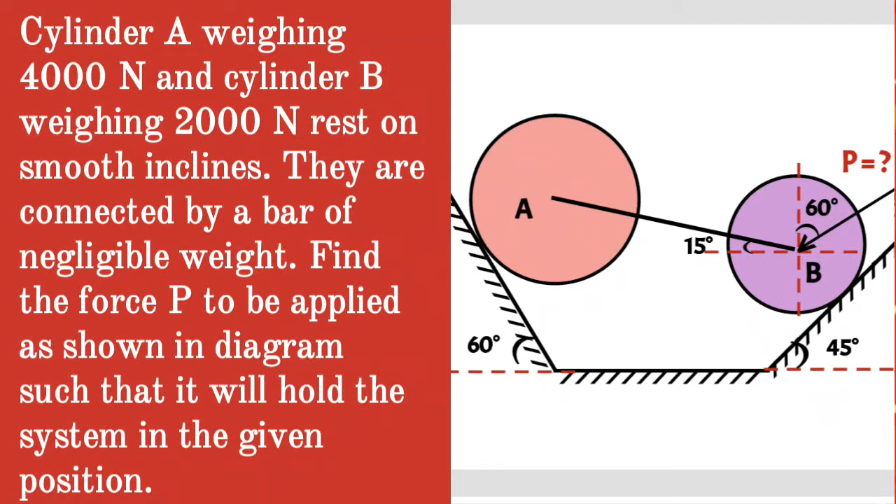Given question: cylinder A weighing 4000 Newton and cylinder B weighing 2000 Newton rest on smooth inclines. They are connected by a bar of negligible weight. Find the force P to be applied as shown in the diagram such that it will hold the system in the given position.

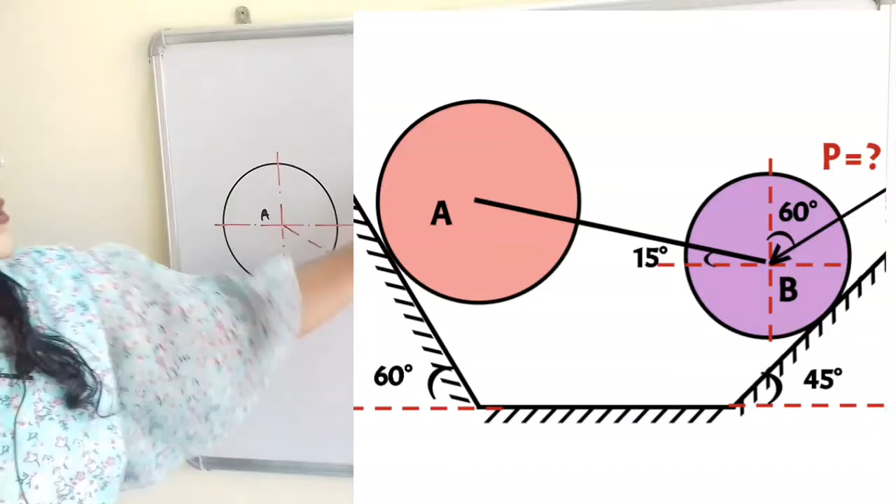Let us understand the given system. There are two cylinders A and B connected with the help of rod AB, and we have to find out the force P applied at the center B to hold the system in the equilibrium position.

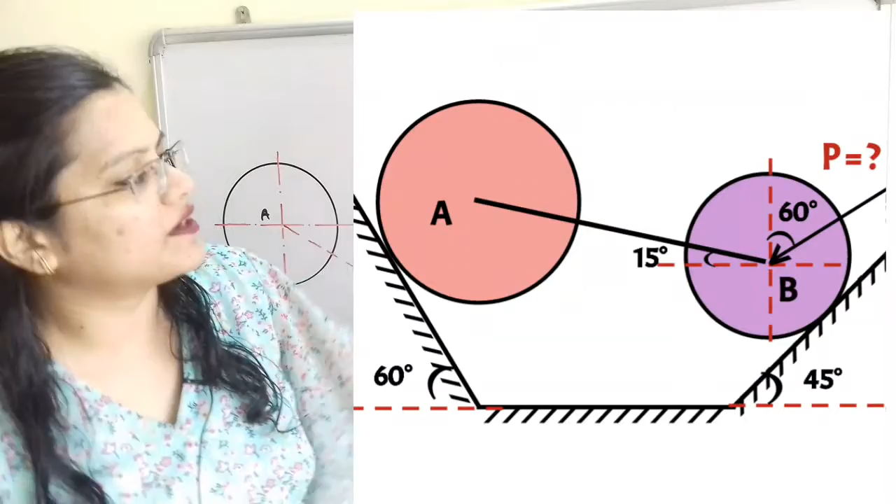Now if we observe, cylinder A is placed on an inclined surface at 60 degrees to the horizontal, and cylinder B is placed on an inclined surface at 45 degrees to the horizontal. The inclination of this bar AB is also given as 15 degrees, and the force P is applied making an angle of 60 degrees with the vertical. Weight of cylinder A and B is also mentioned in the question.

So the first step is to draw the free body diagram. First we will draw cylinder A and cylinder B, and we have to connect these centers. Now this center, that is the line joining AB, is making an angle of 15 degrees with the horizontal.

So we have to mention this, here is the 15 degree angle. Now if we observe the horizontal line passing through A and the horizontal line passing through B, both are parallel, and this is the common inclined line AB. So this angle that the inclined line makes with the horizontal line is also equal to 15 degrees. These are the opposite angles.

Now cylinder A is in contact with the inclined surface, so a reaction is developed. We will say here is the point of contact 1 and this is the point of contact 2. So the reaction developed will be perpendicular to the inclined surface. We have to show here this reaction R1.

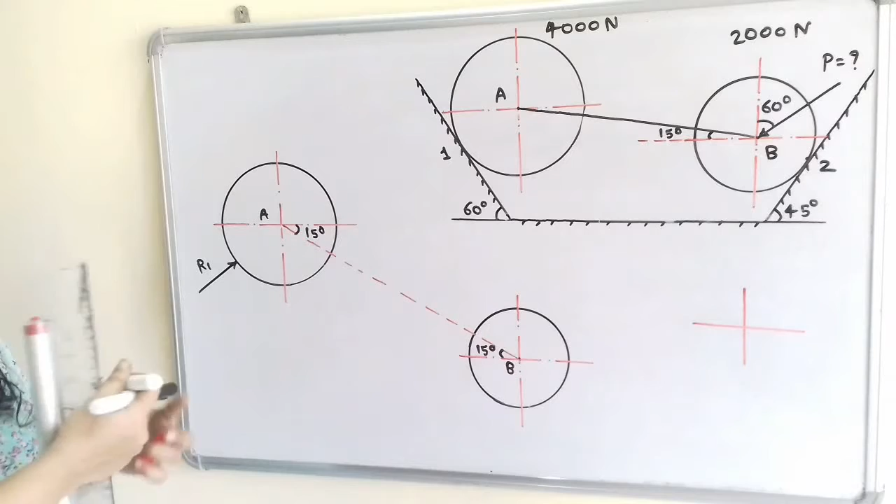Now if I extend this R1, then it will meet the center point A. Now how to find out its angle? If we observe, this R1, the line passing through the center, is perpendicular to this inclined line, and this vertical line is also perpendicular to the horizontal line. So the angle between these two perpendicular lines will be the same, that is this 60 degrees.

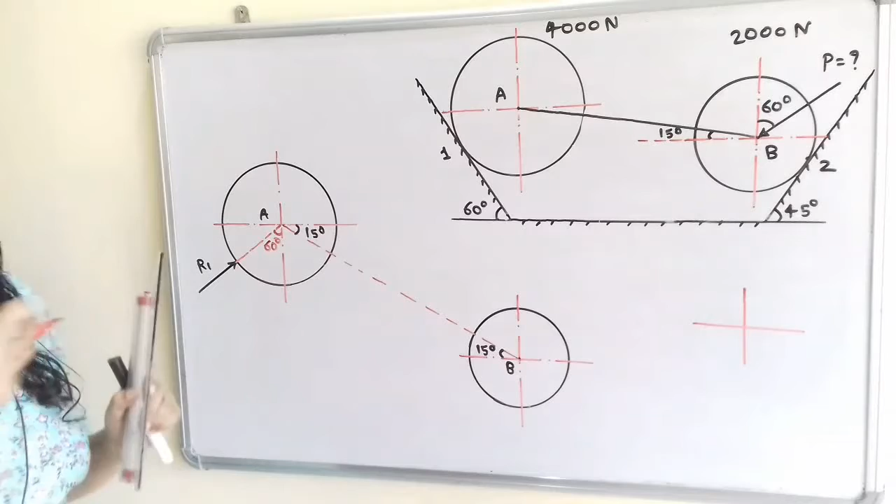Now we have to show the weight. Weight always acts in the vertically downward direction, so we will show here the weight, that is equal to 4000 Newton.

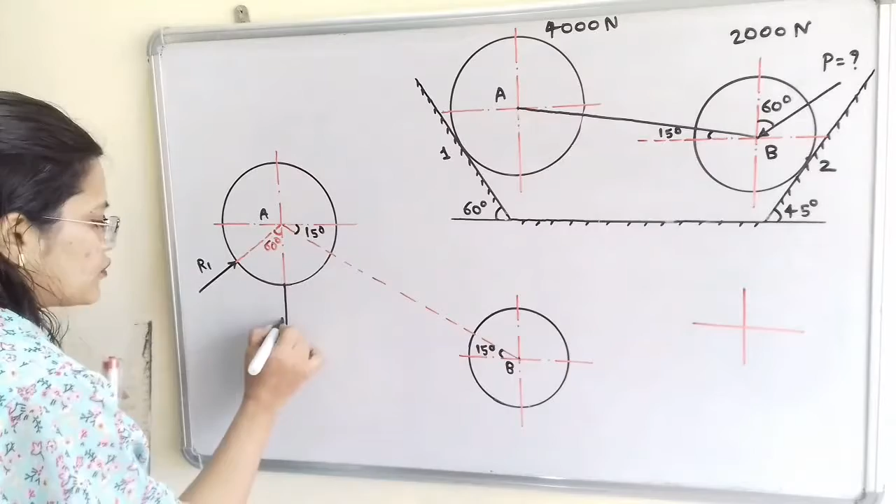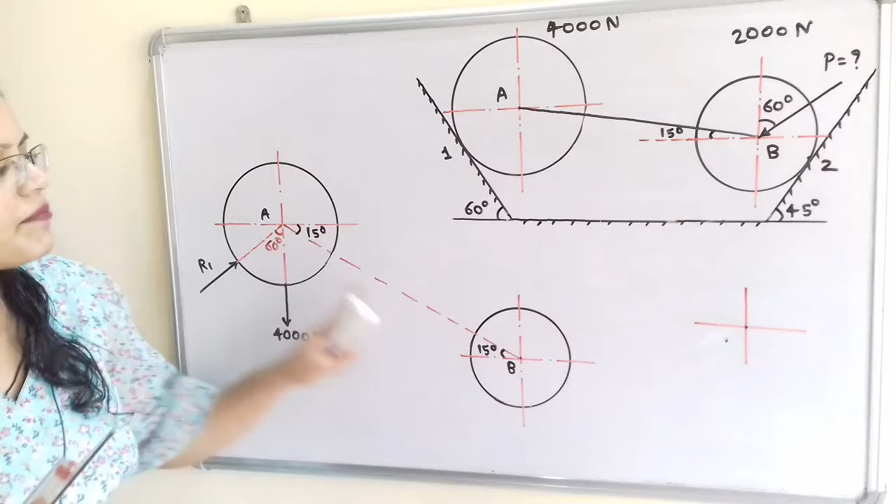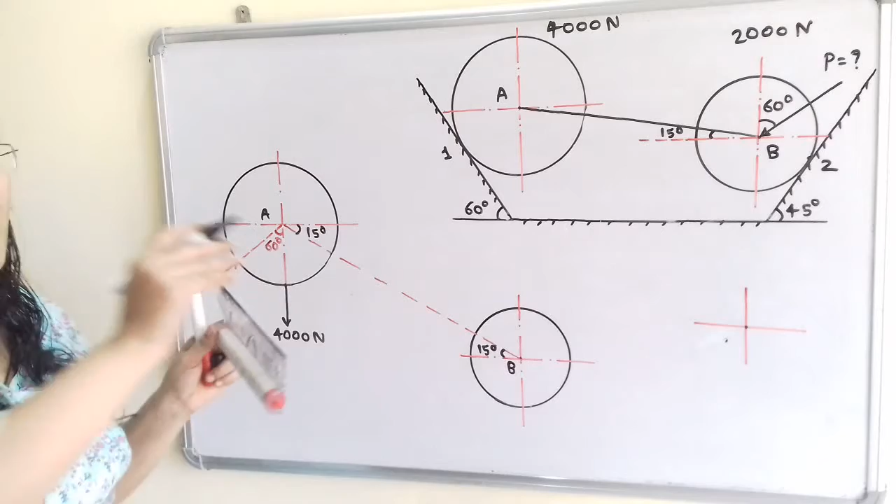There is the bar AB which is connected to the center of cylinder A, so either there is tension or compression in bar AB. We will consider here that compression is created, and due to compression the direction of this reaction force we have to show towards the center of cylinder A. We have to take the assumption, so we can take either direction, towards the center or away from the center. We will consider the direction of reaction towards the center of the cylinder, and we will call it C.

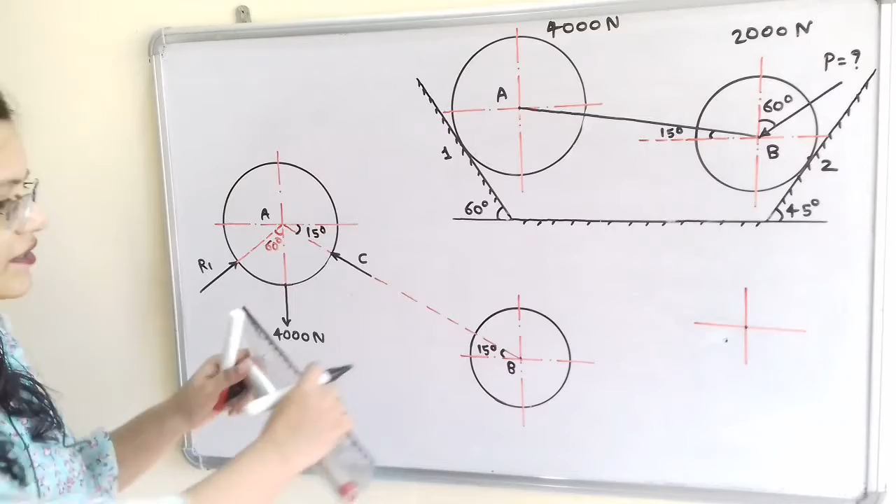Now we will move to cylinder B. If we observe here, there is compression. If this compression is towards cylinder A's center, then in the same way for cylinder B there is compression applied towards center B. So it is equal in magnitude but opposite in direction. We have to show this C.

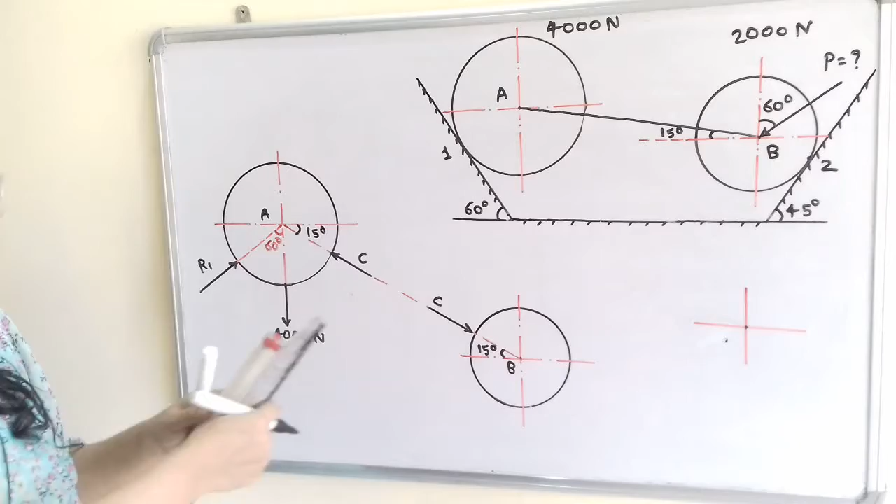Now we have to find out this P applied, which is making a 60 degree angle. We have to show it as it is, acting towards the center, making a 60 degree angle. So here is P, and at the same time we will join this force P with the center and show the angle. So here the angle is 60 degrees, as mentioned in the question.

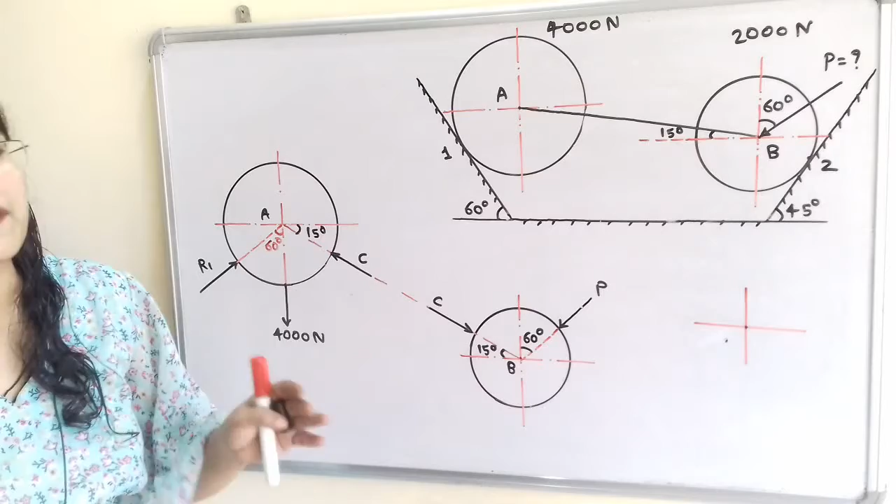Now there is the point of contact 2, and at this point of contact we have to show the reaction, which is in the perpendicular direction to the inclined surface. So we have to show this, and it is known as R2.

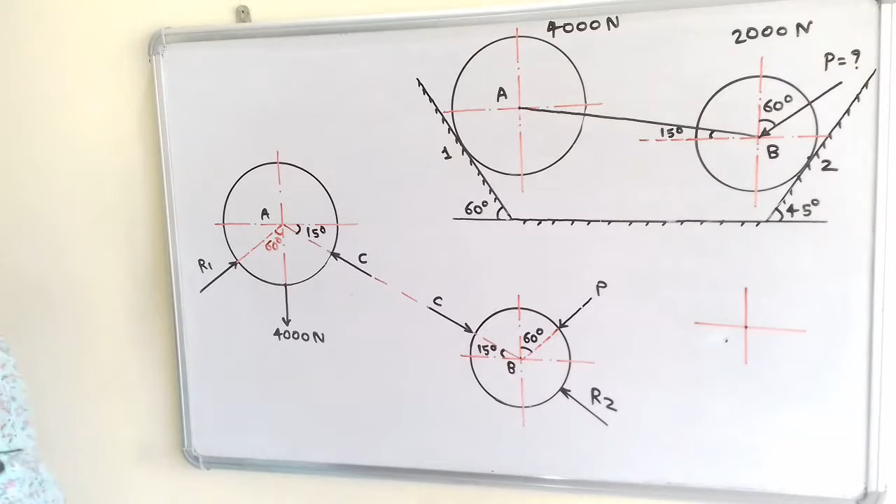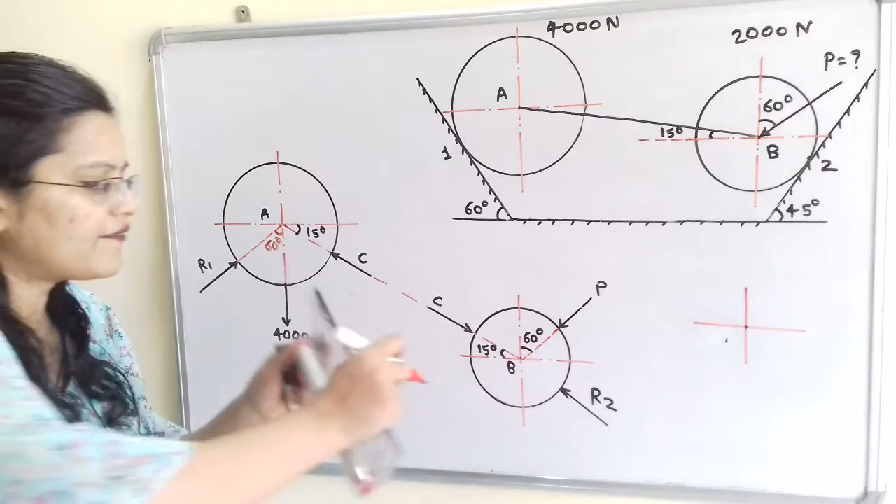Now this R2 is making an angle of 45 degrees. If we observe, R2 is perpendicular to the inclined surface, which makes an angle of 45 degrees with the horizontal. For this horizontal, the vertical line is perpendicular. Now I will extend this R2. R2 is perpendicular to the inclined surface, and this vertical line is perpendicular to the horizontal surface, so the same angle at the point of contact between these two lines equals 45 degrees. We have to mention this.

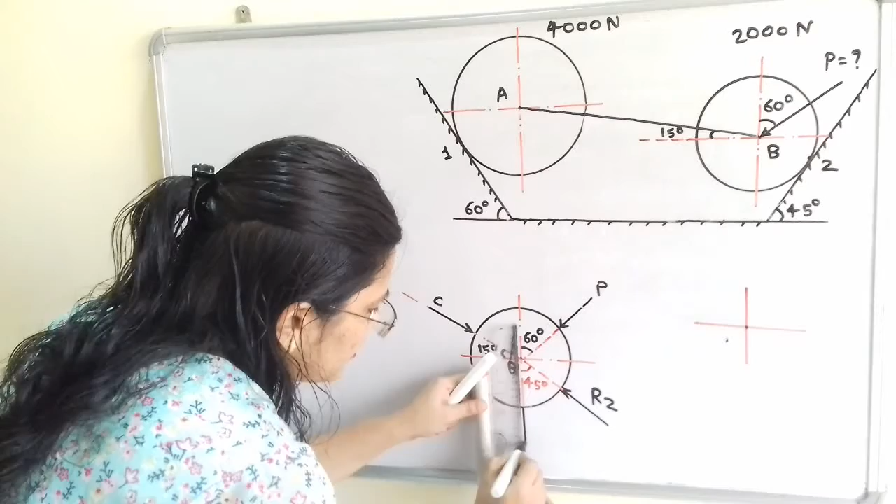Weight of cylinder B is given as 2000 Newton, and it will act in the vertically downward direction passing through the center. We have to mention this here. We have to find out the value of P. So this is the question.

Now we have to first find out the value of C, because C is connected to cylinder B and also to cylinder A. If we concentrate on cylinder A, there are three forces which are concurrent because they pass through the center point A, so we can apply Lami's theorem. We will rearrange these forces so that they move outward from center A. So how to show that?

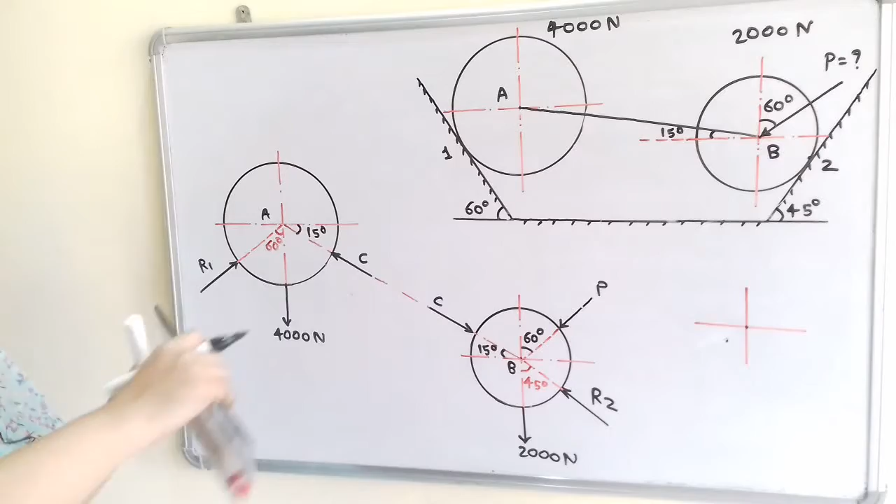I will extend this C in the opposite direction. Here is the horizontal line and here this C, so the direction will be same. Now it makes a 15 degree angle with the horizontal. Here is also a horizontal line, so the same 15 degree angle, we have to mention that.

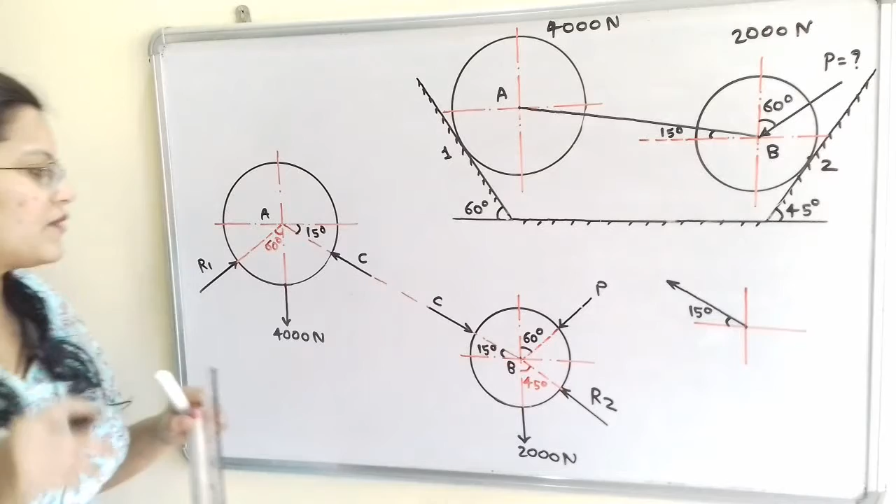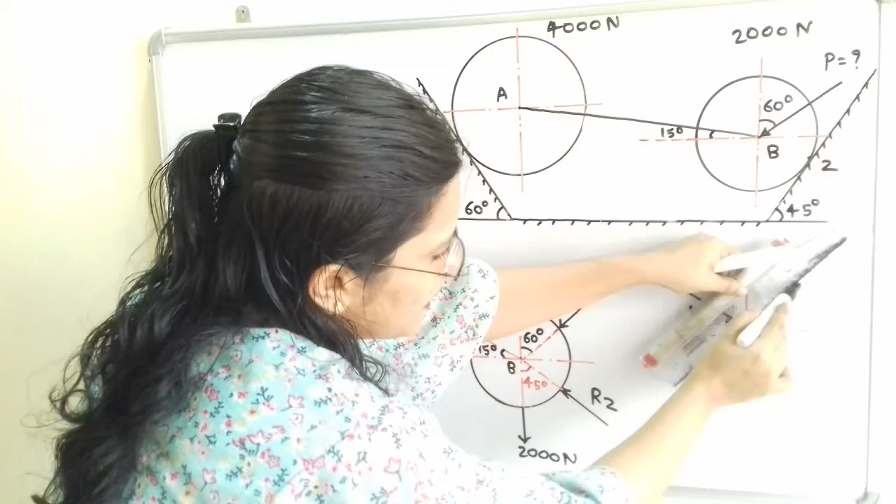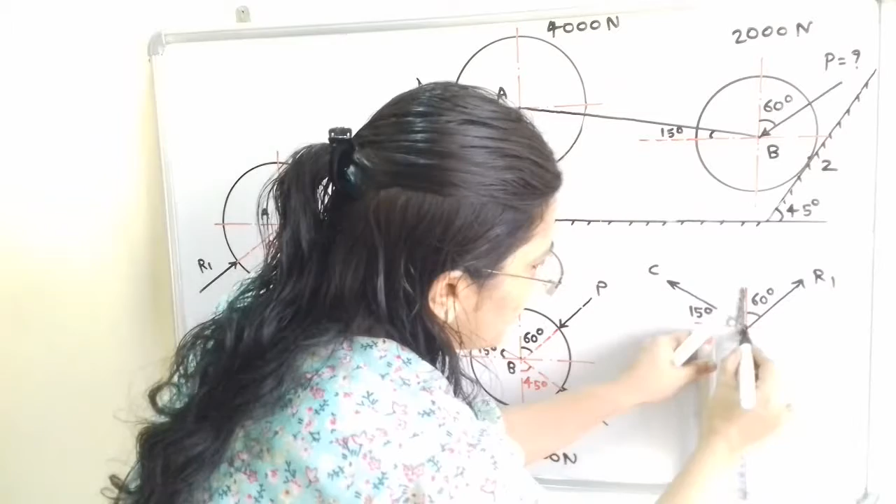Now we will extend this R1, which passes through C in the outward direction from A. With the vertical line it makes an angle of 60 degrees. If we observe, here is also a vertical line, so we have to show here the 60 degree angle, and it is R1. We have to mention R1, C, and this 4000 Newton, which will act in the downward direction. Here we show 4000 Newton and here is the center A.

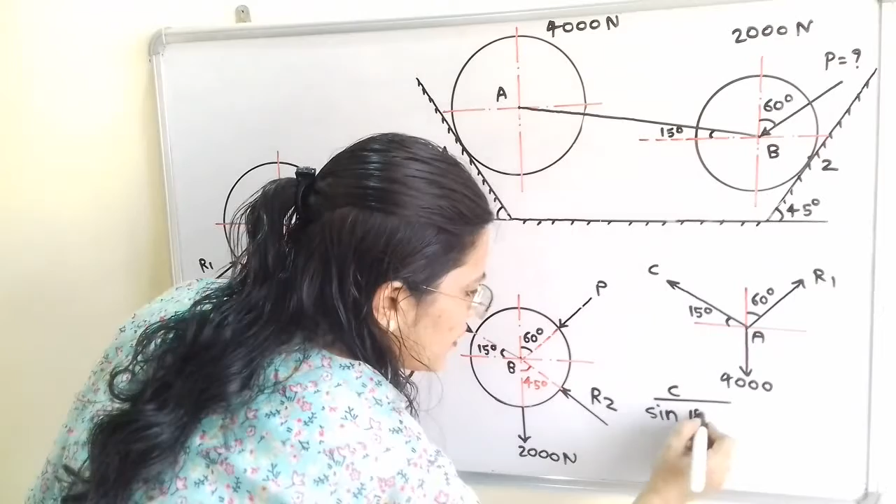Now we can apply Lami's theorem. Our aim is to find out C. So how can we write this? C divided by sine of the angle between the other two forces, that is between R1 and 4000. How do we find that? That is 180 minus 60. Sine of 180 minus 60, which equals, now 4000 is known, so 4000 divided by sine of the angle between the other two forces. So how do we find the other two forces?

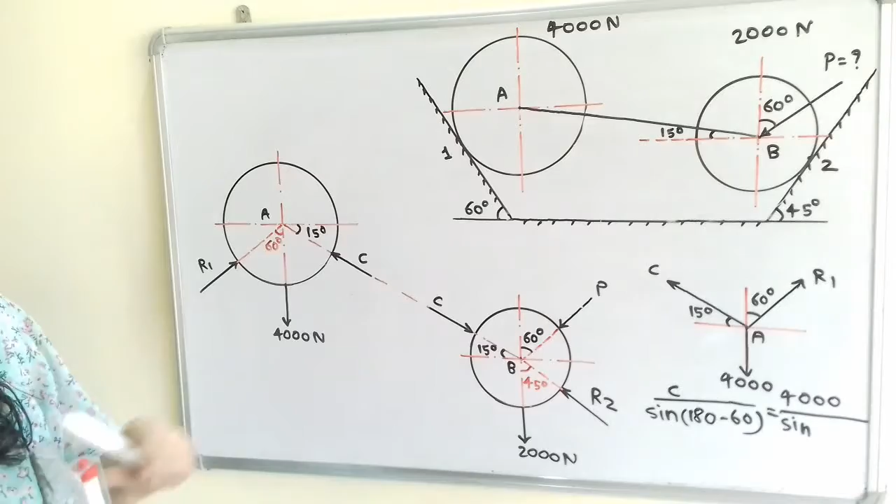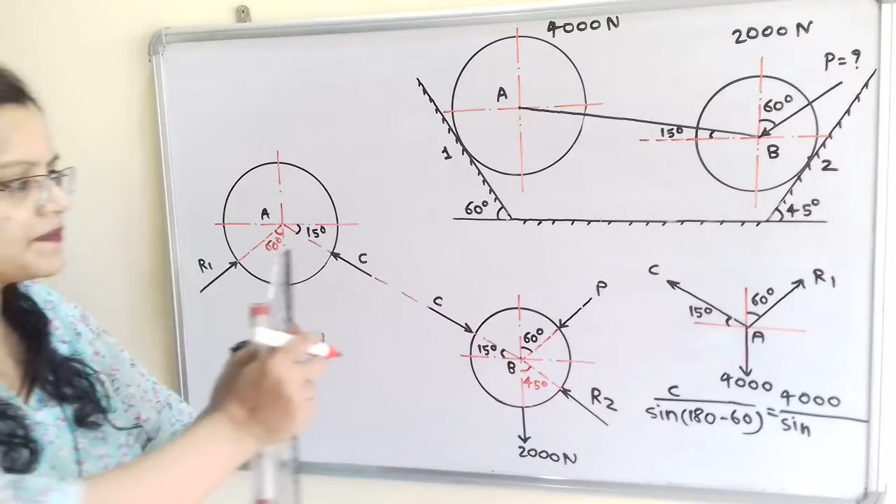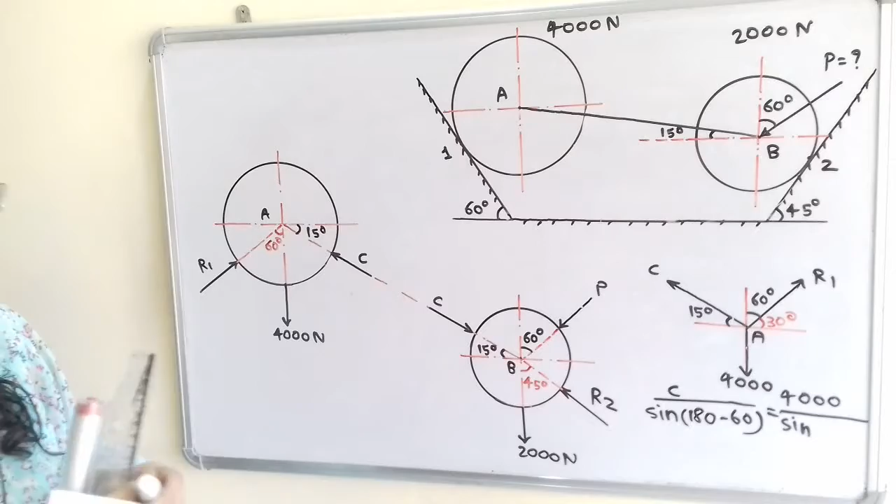We can say that 180 minus, now here 60 plus 30 equals 90, because this vertical line and horizontal line are perpendicular to each other. I will mention this. Here the remaining angle is 30 degrees. So how can we find the angle? 180 minus 30 minus 15. So sine of, I will write here 180 minus 30 minus 15. This right hand side term is known, and we can find the value of C.

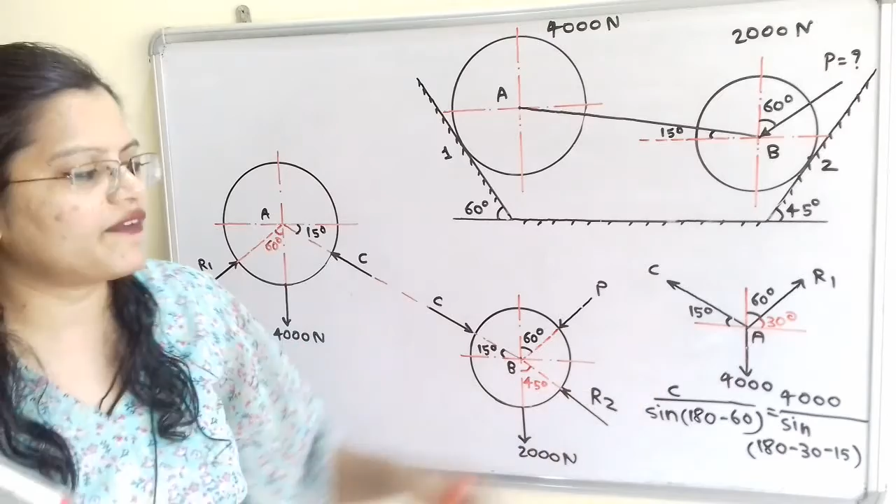Calculated value of C is 4899 Newton. Now we will move to cylinder B. Related to cylinder B, this force C is known, P we have to find, and R2 is unknown.

But this R2 is perpendicular to the inclined plane, so we will resolve the remaining forces into two components: one parallel to the inclined plane and the other perpendicular to the inclined plane. So there is no need to find the value of R2. We will first draw one line which is parallel to the inclined plane.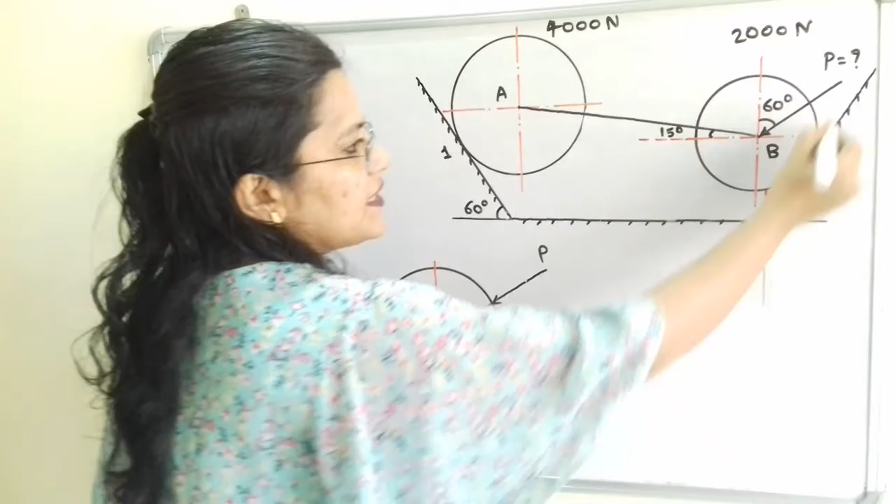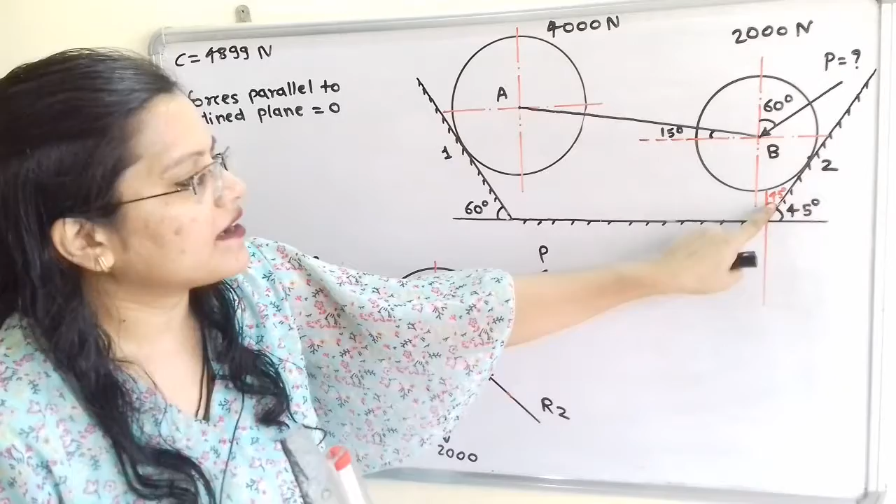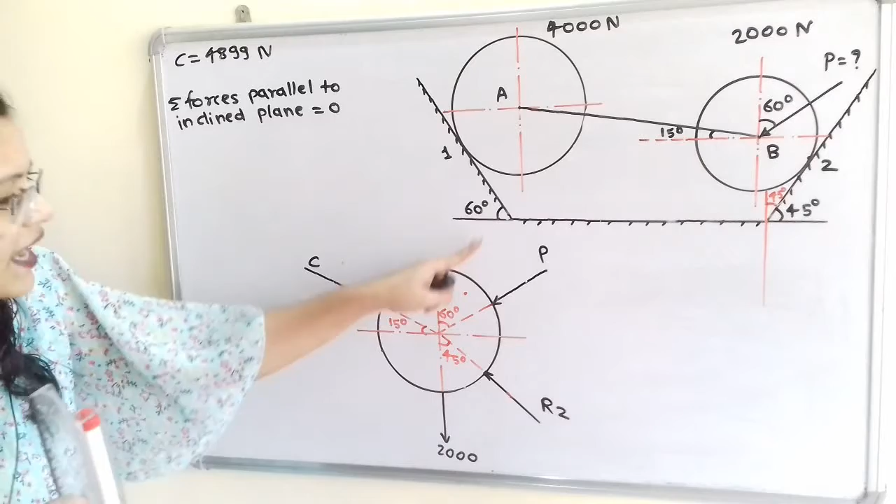Now if I make this construction, from this point I will draw one horizontal line. This inclined plane makes an angle of 40 degrees, because between this horizontal and vertical line there is a total angle of 90 degrees, so here the remaining angle is 45 degrees. From this vertical line I will mark one point at 45 degrees. Sorry, not 40, it is 45 degrees, and I will draw one line. So this is the construction.

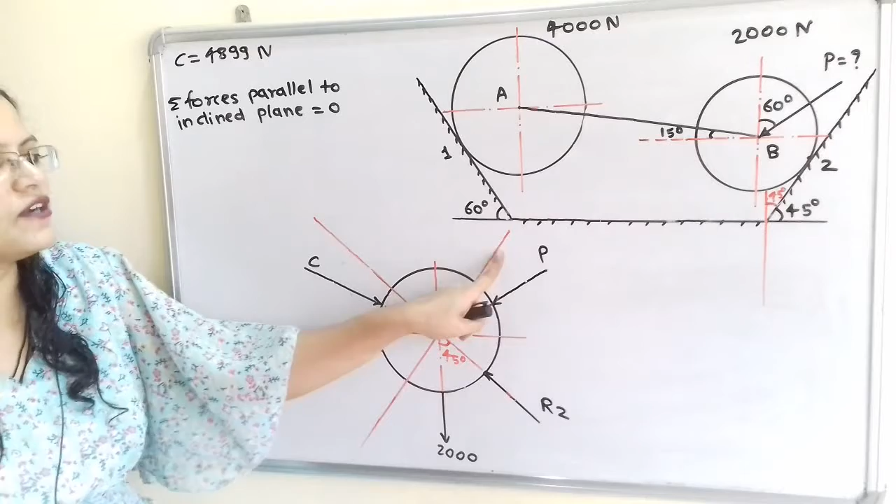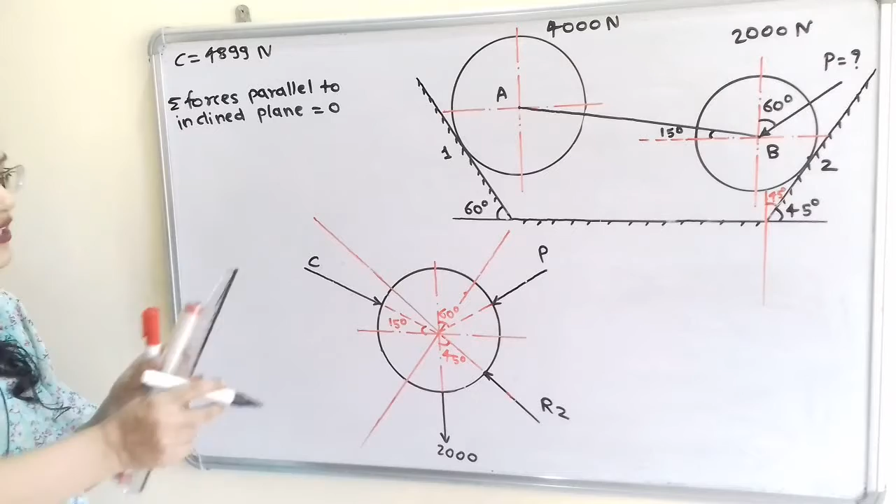So this line is parallel to the inclined plane, and the line passing through R2 is perpendicular to the inclined plane. So these two lines, I will extend them just for understanding purposes. One line is parallel to the inclined plane and this line is perpendicular to the inclined plane. Now we will resolve the forces. We will resolve this component C, so one component is parallel to the inclined plane. I will take this line parallel to this and resolve here.

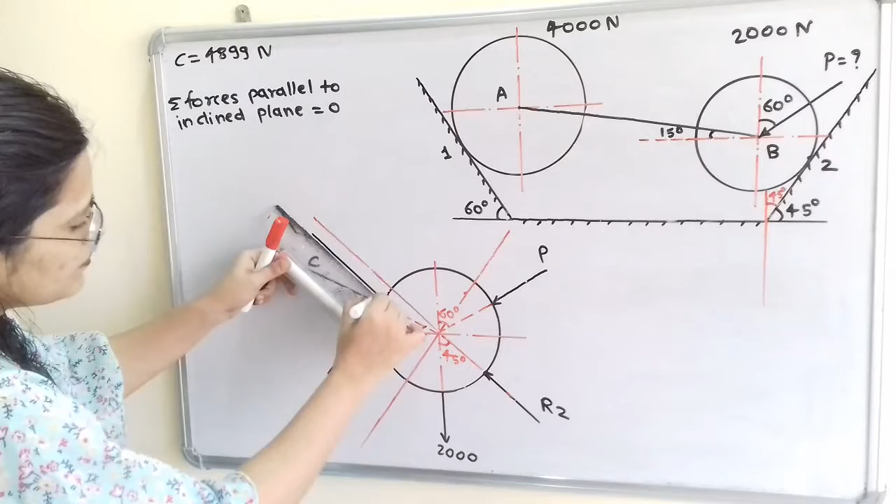And the other we will resolve which is the parallel to this perpendicular line. Now we will find out the angle in between this force C as well as this component which is parallel to this inclined surface. So how to find out?

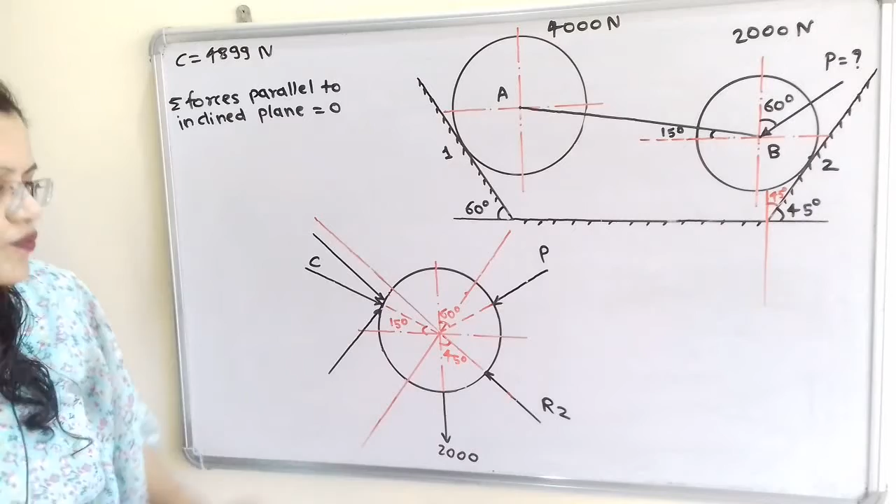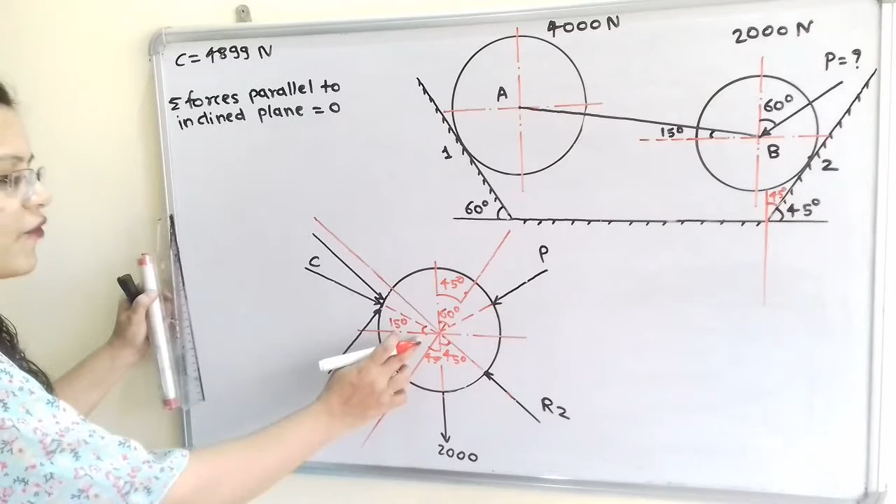First we have to find out the angle in between these two. If we observe, this angle made by the inclined line with this vertical is 45 degrees. Here also with this vertical line, this angle is 45 degrees. So what is the remaining angle? Here is the horizontal line and this is the vertical line, so the remaining angle is 45. So total angle is 45 plus 15. In between this inclined line, that is this line passing through C, and this line is 45 plus 15. Here also total angle is 45 plus 15. I will write it as 45 plus 15.

So how can we write this value, that is this component? We can define it as C cos of 45 plus 15. So we have to write this, and here the value is C sin of 45 plus 15. Now we have to consider forces parallel to the inclined plane, so we will consider only this component.

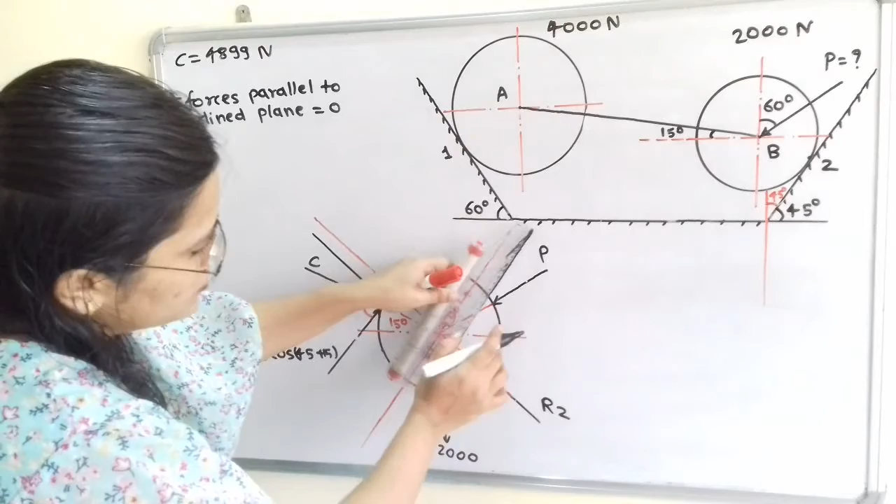Now we will move to P. For P also we have to resolve into two components. One should be parallel to this inclined plane, I will show here, and one should be perpendicular. So here we have to draw the line parallel passing through R2.

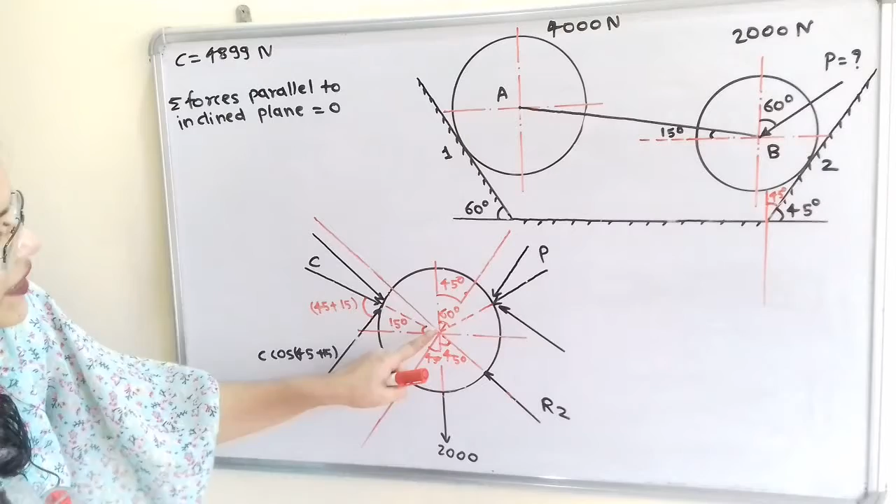Now how can we define this angle? The angle in between this parallel line and P. If we observe, these two lines are parallel lines. The total angle in between this vertical and P is 60. And the angle in between this parallel to inclined surface and the vertical is 45. So remaining angle is 60 minus 45, that is equal to 15 degrees. I will write it as 15 degrees. So how can we define this component? P cos of 15.

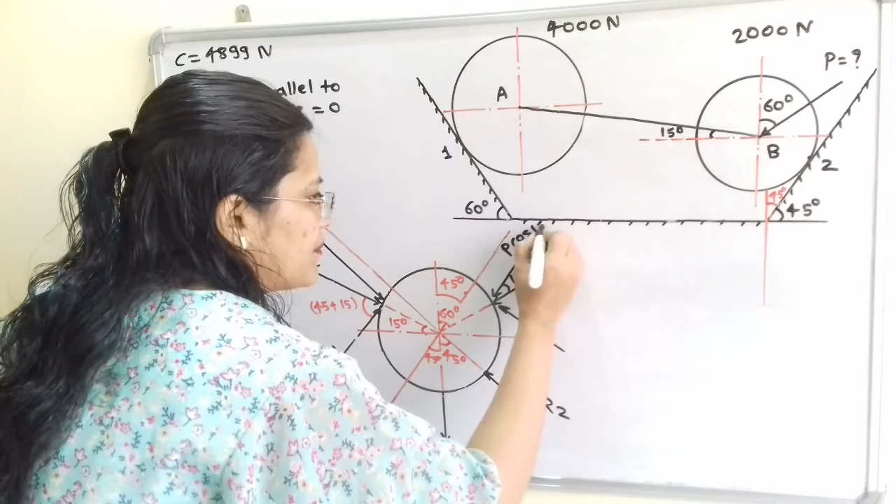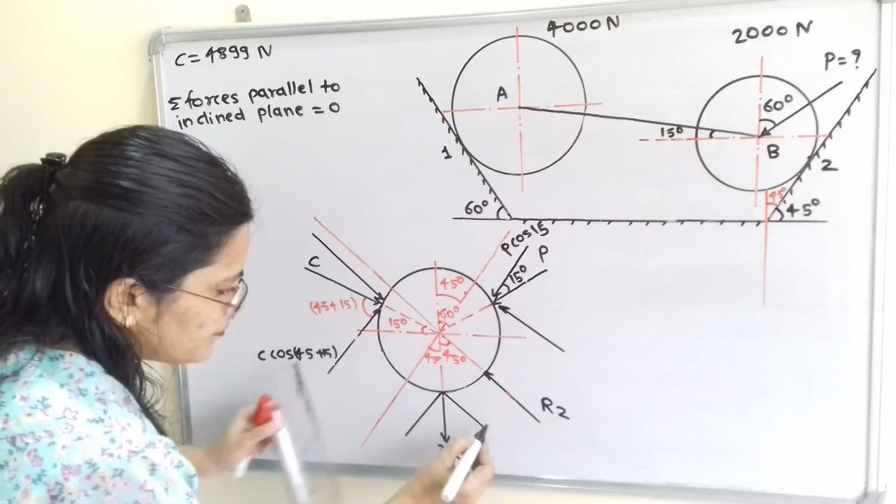Now in the same way we will resolve this 2000. When we resolve, we have to take one line parallel to this inclined surface, and one perpendicular, so we have to show this. Now we only consider forces parallel to the inclined plane, that is this component. How can we define the angle? If we observe, this inclined line is making a 45 degree angle with the vertical, and this vertical is nothing but 2000. So here is 45 degrees. So we can define it as 2000 cos of 45.

Now no need to resolve this R2 because it is perpendicular to the inclined plane, and we only consider forces parallel to the inclined plane. Now we will put the data. So forces parallel to inclined plane, here is this main line. So this force is C cos of 45 plus 15. 45 plus 15 is 60, so C cos of 60.

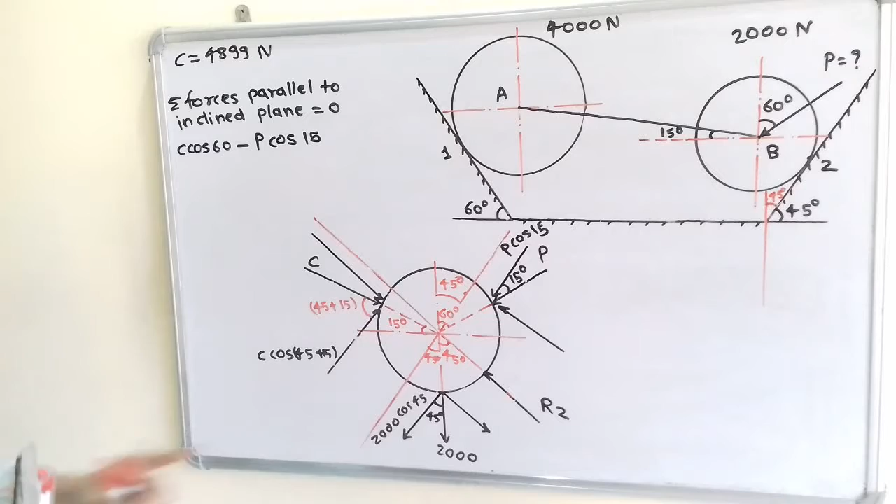Now this is in the upward direction, so we will consider this plus sign. Then here P cos of 15, so it is in downward direction, so minus P cos of 15. Then the next one is 2000, also in downward direction, so minus 2000 cos 45, which is equal to 0.

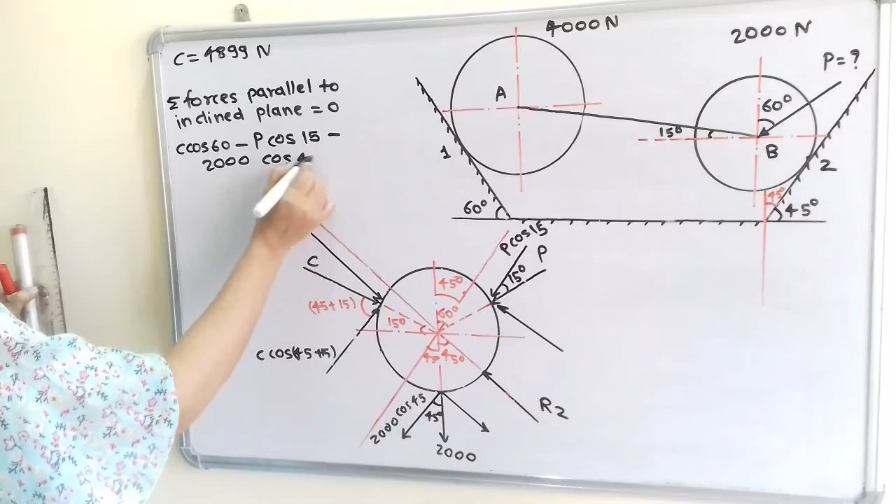So C value is known, so only one unknown term, that is P, and we will find out. Value of C is 4899. So when we solve this, C cos 60, then 2449.5 minus P cos 15, that is minus 0.96P, minus 2000 cos 45, that is 1414.2, is equal to 0.

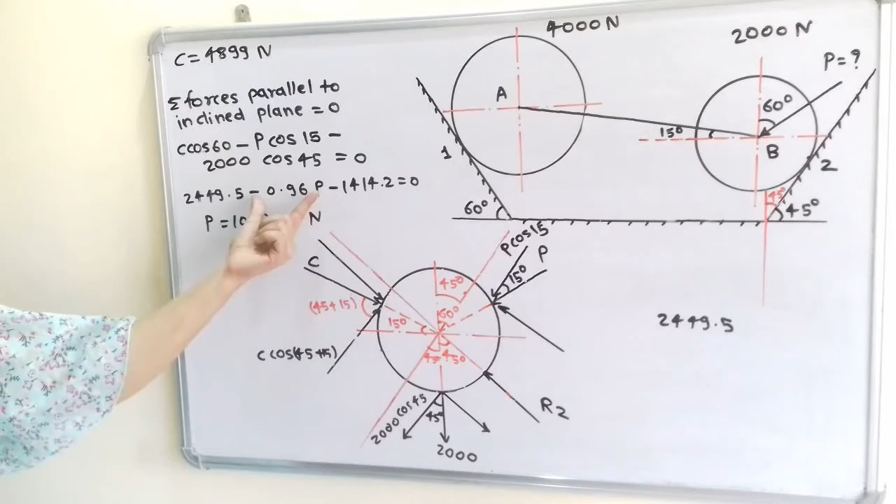Now we will transfer this 0.96P to the right hand side, so it will become plus. And when we solve this, P is equal to 1078.43 Newton.